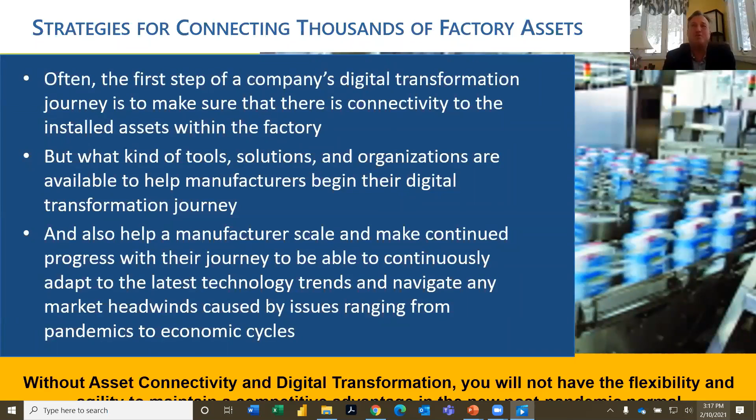So companies are always looking for ways to continue to adapt the latest technology, knowing there may be headwinds in the marketplace that sometimes make it more difficult to obtain and get justification for that technology. But the only thing we can certainly say is that if you don't have asset connectivity and digital transformation, no company, regardless of industry or what you produce, is going to have the flexibility and agility to keep that competitive advantage in this flat world and this post-pandemic new normal we're all moving towards.

So we talked about how essential asset connectivity is to digital transformation. We're all very familiar with Industrial Internet of Things and Industry 4.0. These technologies use low-cost sensors to measure and record the behavior of assets. This behavior helps us with things like proactive maintenance, predictive maintenance, reducing unscheduled downtime, increasing productivity through different KPIs or metrics such as overall equipment effectiveness, and increasing the overall value of the organization and the operation.

So everybody's really been affected by either Industry 4.0 or IoT implementation. You cannot move forward with digital transformation without having that level of connectivity down to the least expensive sensor, because you don't want the weakest link in the chain to be something that's not connected and not providing information. You've got to make sure you have that connectivity to things—even situations where assets on the factory floor are old and need low-cost sensors installed to have that IoT connection, so it can participate in the digital transformation of the organization without a full rip and replace.

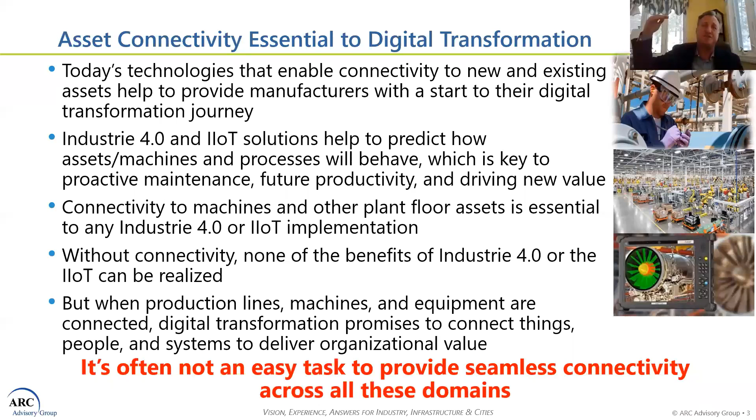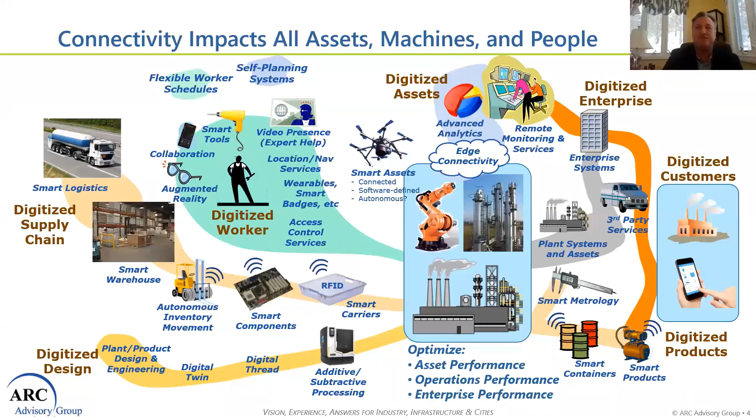You can't get what we call at ARC the single version of the truth if all your assets are not connected. So the idea is that every fixed asset, mobile asset, human asset, machine - the common denominator is everything must be truly connected to achieve the digital transformation required to survive in this world.

And it's not like connectivity is new. There are certainly proprietary network connections that go back to the 1970s and 1980s, for example, and you certainly began to see standards like OPC appear in about 1996. But as these things continue to evolve, what are the latest standards, connectivity tools, and processes to help companies connect those multiple generations of assets on the factory floor.

So we put together a really exciting group of speakers today at this session, coming from automotive manufacturers, standard organizations, and engineering organizations. We're going to present some case studies and solutions that have helped - in this case leading more on the discrete side - to give you the industrial interoperability required to complete your digital transformation journey, provide the business value you're looking for, and most important, especially today, provide manufacturers with the operational resilience to not only survive but thrive in this post-pandemic world.

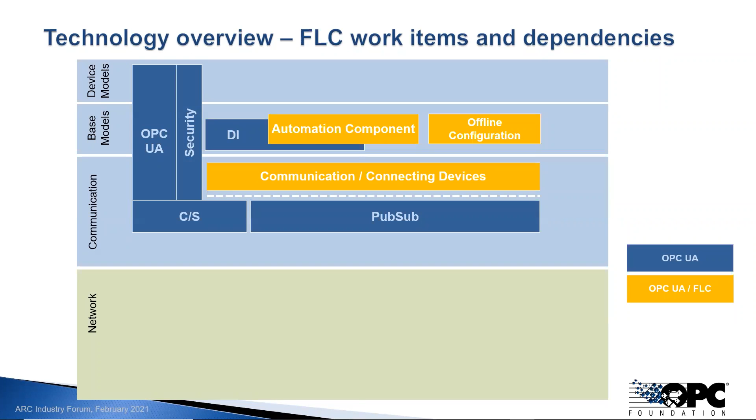The FLC technical working groups are specifying a base model for automation components with the possibility to do offline configuration. In addition, mechanisms for connection establishment are being specified. On top of these base models and base concepts, different device models are being specified for various device types and application areas, covering motion, process instruments, remote IOs, and also functional safety, which is what we call OPC UA safety.

Furthermore, existing or future device companion specifications can be integrated. So for example, the companion specifications being developed by the VDMA, which we will hear about in a separate presentation, can be integrated, or other companion specifications out of process industry, for example PADIM or MDIS.

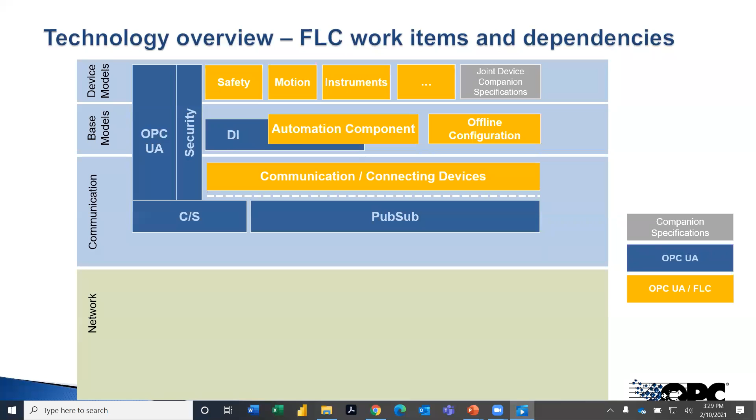When we look down to the network layers, we find the different options for transporting data. This is about using Ethernet or Ethernet TSN, covering also the advanced physical layer or single pair Ethernet, as well as conventional shielded twisted pair cabling. Here we also find the IEC IEEE 60802 TSN IA profile, which is about using the same TSN features to allow multiple protocols to coexist in a common network infrastructure.

The FLC initiative also defines different communication profiles. On one hand side, a UDP/IP profile, which is a routable protocol, very flexible, but then there is a second communication profile optimized for efficiency with a direct layer 2 mapping, used for more demanding applications, for example high performance motion. The complete structure is prepared to also cover additional standards such as 5G or Wi-Fi 6, Wi-Fi 7 in future. Finally, FLC is defining conformance testing to ensure a high level of compatibility and interoperability.

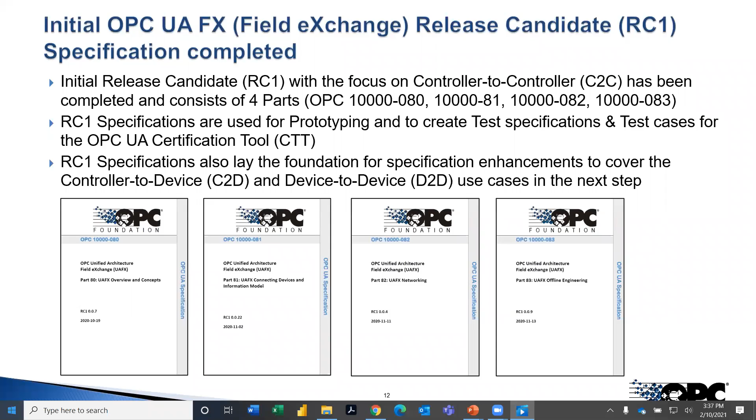We have also published a technical paper which talks about the overall vision, explaining the technical approach and educating on the basic concepts for bringing OPC-UA to the field.

For those of you that want to dive more into the technical details, we are providing additional material, mainly derived from a webinar we held beginning of December last year. This material includes recordings of the various presentations, the different slide decks, and also a compilation of the Q&A.

To summarize my speech, I wanted to explain how the OPC Foundation, together with its FLC initiative, is supporting industrial interoperability from field to cloud and vice versa, covering all the different requirements out of factory automation as well as process automation, including key technologies such as Ethernet TSN, single pair Ethernet, and advanced physical layer, as well as future standards such as 5G, Wi-Fi 6 and Wi-Fi 7.

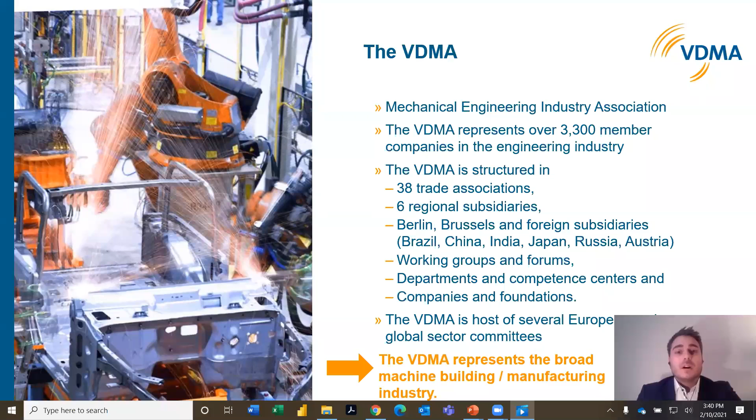And we have the possibility to also harmonize between the different branches because it's all under one umbrella called the VDMA. But let's come to the topic OPC-UA. We need to go one step back, because OPC-UA is not what we were looking for from the beginning. The need of the mechanical engineering industry was standardized interfaces.

So there are a lot of requirements. It has to be on an open platform, security by design, support of different protocols, of course, and importantly, the semantical machine description. This is what I will tell you more about later.

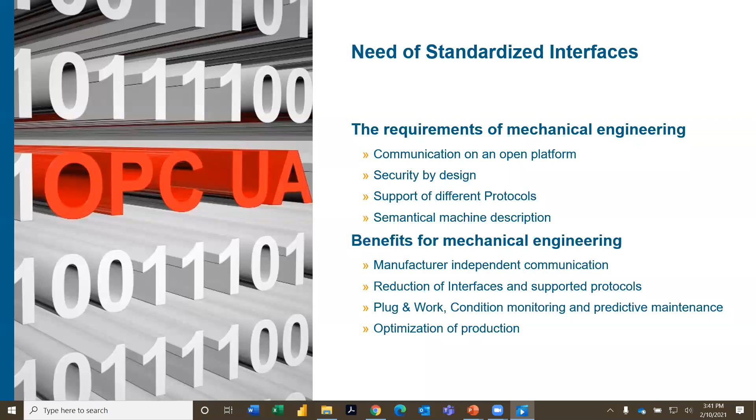And the benefits are clear. It's manufacturer independent communication. You can reduce your supported interfaces and protocols and be more efficient, have a better plug and work promise. You can do easier condition monitoring and predictive maintenance. And of course, you can optimize your production.

The OPC-UA technology was, in our research, the solution which fit these requirements. OPC-UA, Open Platform Communication Unified Architecture, is open source. It has a security by design approach. It supports various protocols, and it has the semantic machine description, the so-called OPC-UA companion specifications.

And those companion specifications, of course, don't fall from heaven. It's hard work to really develop them and bring them into the market. We have a process for that, and we have been doing this for about 4 to 5 years. So I think we know what we are doing.

It starts with preliminary work, where we have to get the critical mass of companies behind those developments so that we have the possibility to really spread the companion specifications worldwide and bring them into adoption. Then we do the content work, defining which information should later be in the interface. Then we do the design in OPC-UA, where the information modeling and the OPC-UA companion specification come into play. And then we have the publication, the use in the industry, and an international approach.

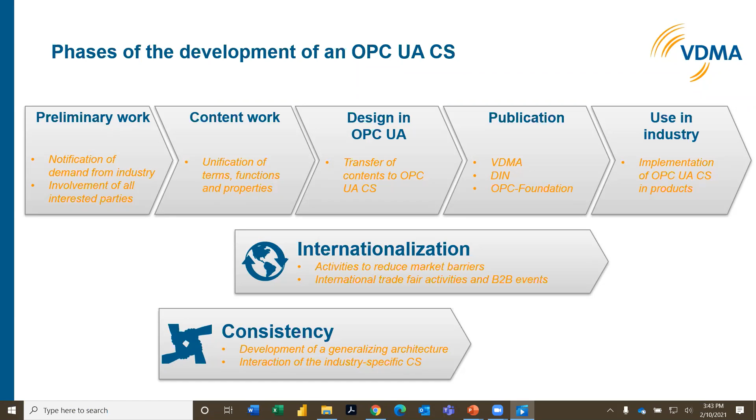And of course this is really important: we are looking for strong consistency between the different specifications. I will give you first an example from the robotic group, of what preliminary work means. They started in February 2017, and about 35 companies were involved. You can see here, on the one hand, the core working group members.

Those are the members who started the group and defined the scope. We have a big group: end users, research, component manufacturers, machine builders, robot manufacturers, system integrators, and IT and software companies were involved. We had strong preliminary work to get the critical mass of companies, of all stakeholders relevant to the OPC UA companion specifications, into the group.

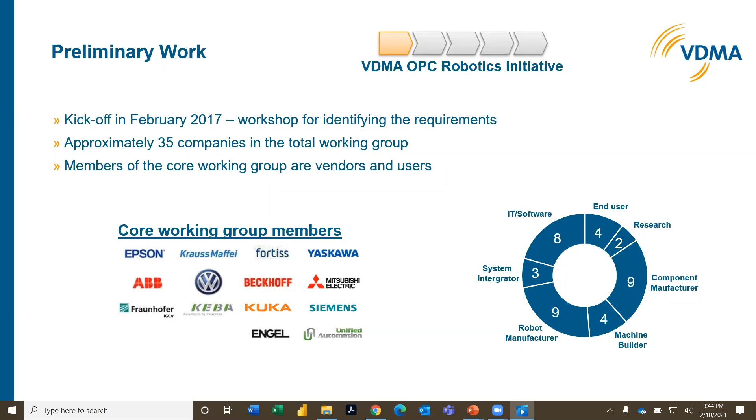The next step - I want to make a short exercise with you. Please imagine a robot. Now I'm pretty sure there are a lot of different robot types in your minds. Some of you will have industrial robots, some mobile robots, some maybe just linear axis. The question was how to bring all these different types of robots into one specification, one interface.

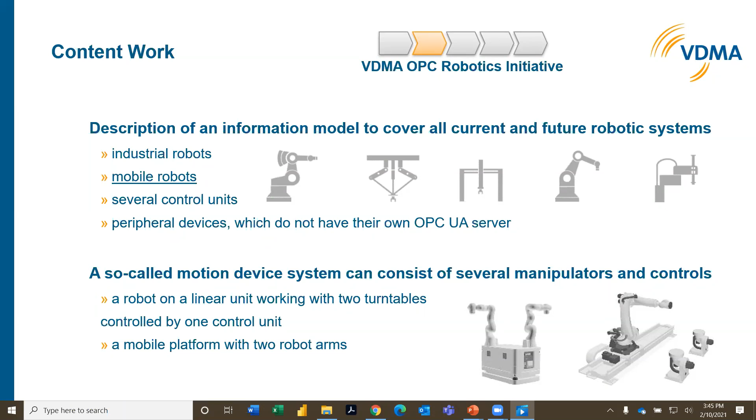This is what we're doing in our content work. The group developed an approach not only for a specific robot, but for so-called motion device systems. A motion device can be anything which has axes, which can turn. Any kind of robot can be described as a motion device.

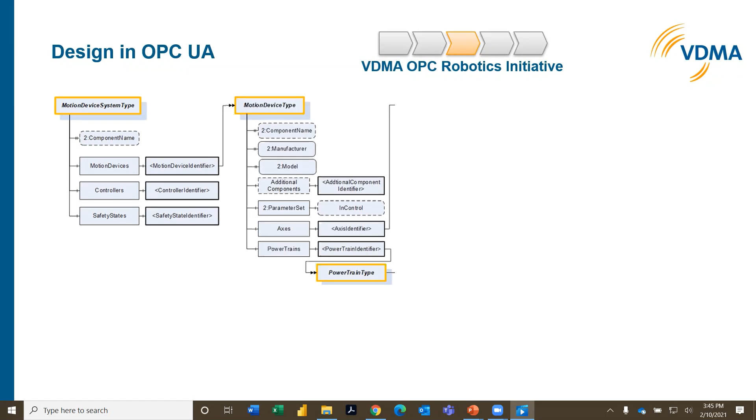In the next step, the design in OPC UA, you can see this approach. There are motion device systems. Motion device systems can contain motion devices, controllers, and also safety states. The motion device itself is built up of, for example, axes and powertrains. A powertrain is a motor and also a gear. The axes are also described in the axis type.

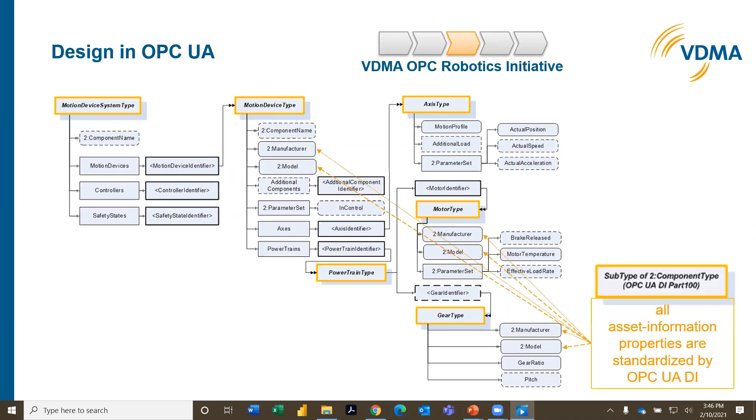Starting with this information model, you can rebuild any robot you had in mind, because if your robot had 4 axes, you can instantiate this axis type 4 times. This was all taken out of the OPC UA DI specification, marked here, and it's all PubSub capable.

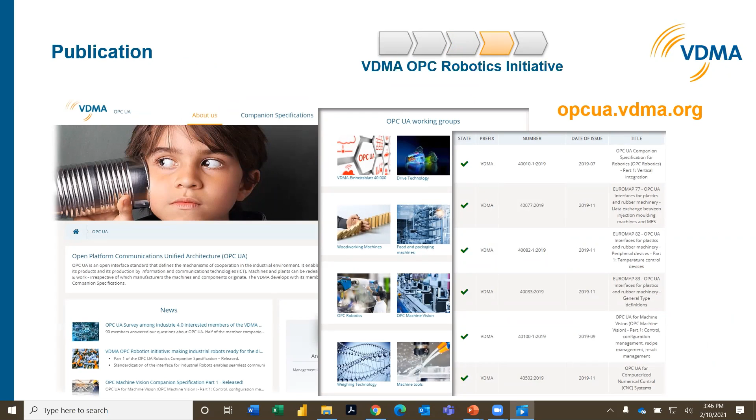For publication, we have a homepage, opcua.vdma.org. There you can find all information about the working groups and also the download area for all the specifications. Last but not least, we are working on these specifications to have them used in the industry.

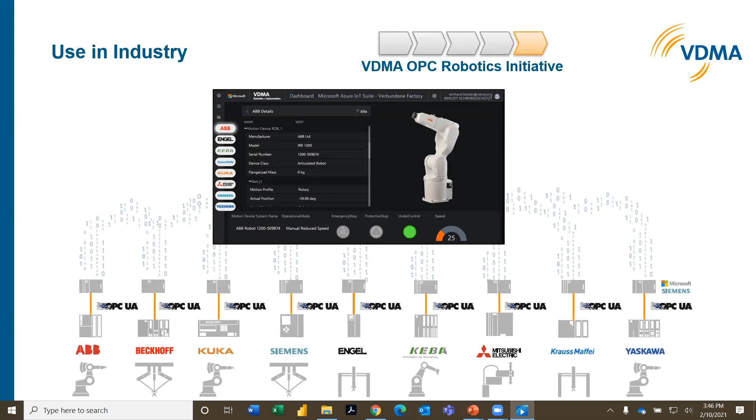For that, we are doing demonstrators. For example, here the demonstrator from robotics, where a lot of robot manufacturers were able to show their capabilities in one dashboard supported by Microsoft Azure Cloud.

Right now I told you about the process to get domain-specific harmonized information models. This is all based on OPC UA, the technology for meshed communication network, and we have working groups doing those specifications. Here you can see the different specification working groups - for example additive manufacturing, cranes, foundry machinery, machine tools, machine vision, plastic and rubber machinery, robotics, woodworking machinery. So really the broad manufacturing industry is working here on OPC UA companion specifications.

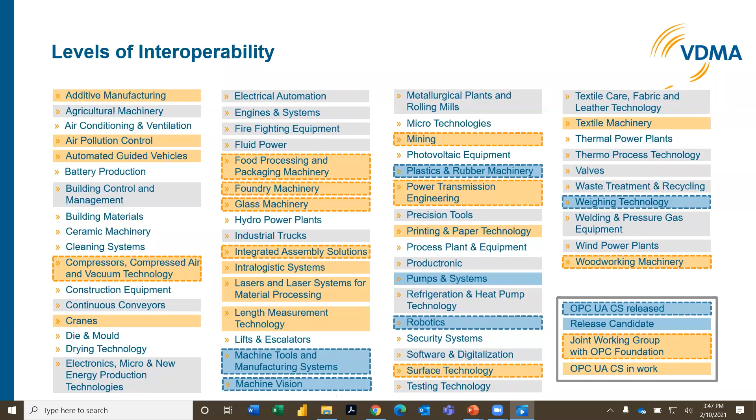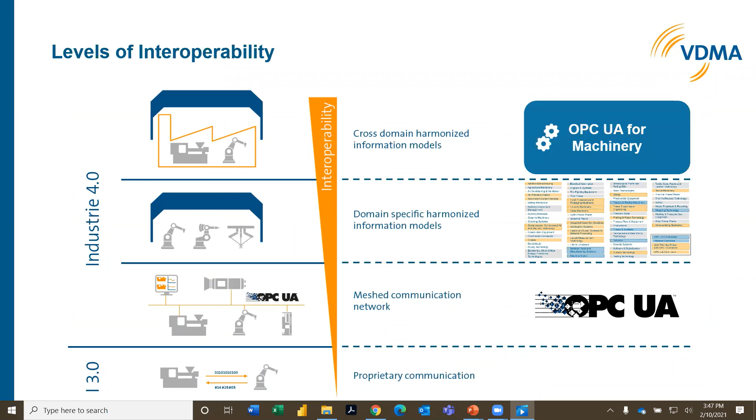In addition to those domain-specific harmonized information models, we need cross-domain harmonized information models. That means we need OPC UA for Machinery. OPC UA for Machinery is a specification which defines building blocks for use cases relevant for the whole machinery industry - for example, identification of machines and components, the topic of machine status, job management, and more.

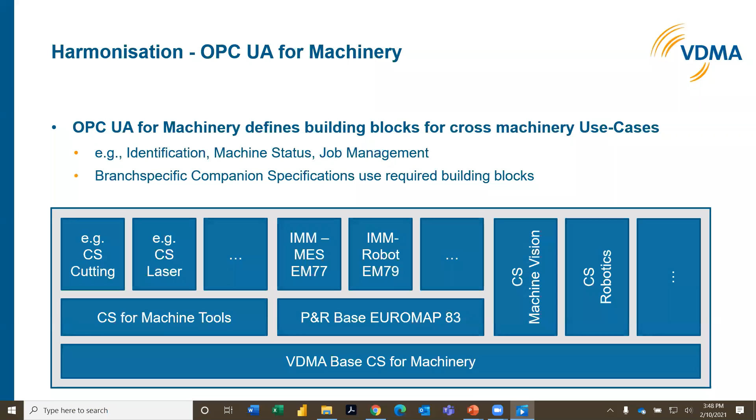All the specific companion specifications from the different branches of the machinery industry are using OPC UA for Machinery as a base for their domain-specific specification work. With this, we have a common basis, and the different domains can then build their specific needs and specific interfaces on OPC UA.

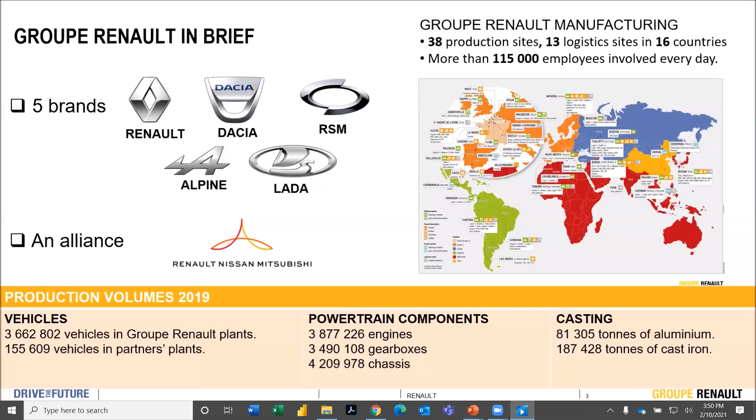In 2016, Renault launched numerous digital initiatives in a benchmark factory in Spain. From this experience, in 2017, we launched many digital transformation projects.

This project revolved around 5 major pillars: real-time data-driven operation, full track and trace, flexible supply chain and plant, Process 4.0, and connected workforce. The subject I will detail lays the foundation for several transversal subjects.

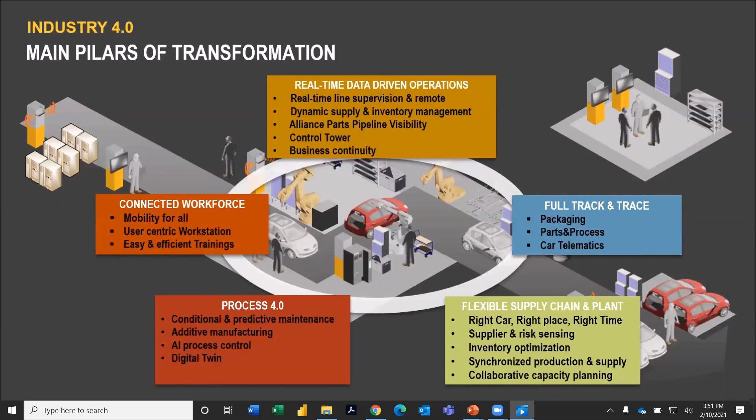Regarding industrial data, over time we have accumulated numerous technical solutions which have partitioned the data by typology. Several examples allow me to illustrate my remark.

An example on traceability in the powertrain plant: an Atlas Copco system where we have Atlas tightening controllers, and for conditional maintenance on robots, we have a specific system per brand.

If we talk about automated installations, we have installations from way back until today, with significant diversity of automation and protocol components.

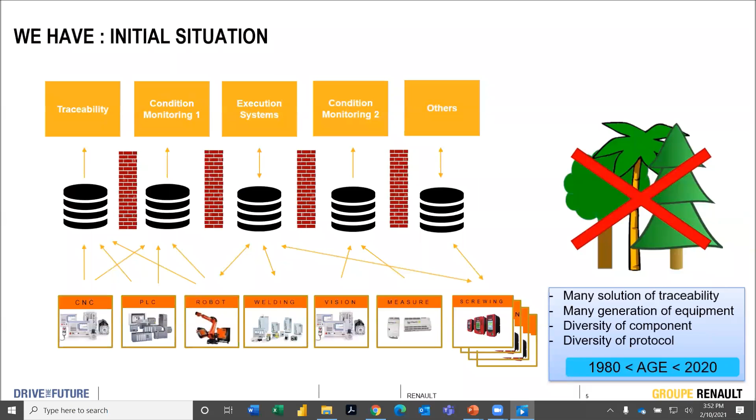Each of the technical solutions has its own architecture, and when we try to mesh data together, it is very complicated.

When we look at industrial installations, we have a lot of data from industrial equipment such as PLC, input-output, Boolean, robot, vision system, variable speed drive.

If we look at the functional need, we need answers on product traceability, process traceability, measures, state of stock, photo, and video. For the end customer, we see that this data is of interest to many businesses in the company: quality, energy consumption, maintenance, automation, and manufacturing.

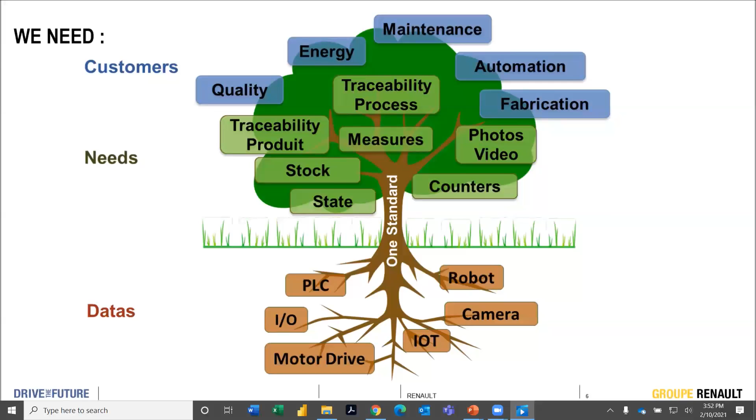To meet these multiple needs, we have defined a standard for data capture, and we have a strong slogan that is spread across the company with a common target: collect once and use many.

For the capture of industrial data, there are 2 essential layers: the industrial layer, or repository layer, where we have defined the data model and the single publication table; and the data acquisition layer, where we collect structured data from different industrial equipment.

The conditions for success for this digital transformation: a common data dictionary, a unified information structure, the right granularity of data for a maximum of use cases, a worldwide standard, and a common automation and IT approach.

To meet this condition, we have chosen OPC UA technology with a data model approach. This element will make it possible to meet the challenge of the factory of the future, where we have unified data capture, interoperability, machine-to-machine communication, edge, cloud, big data, machine learning, artificial intelligence, and digital twin.

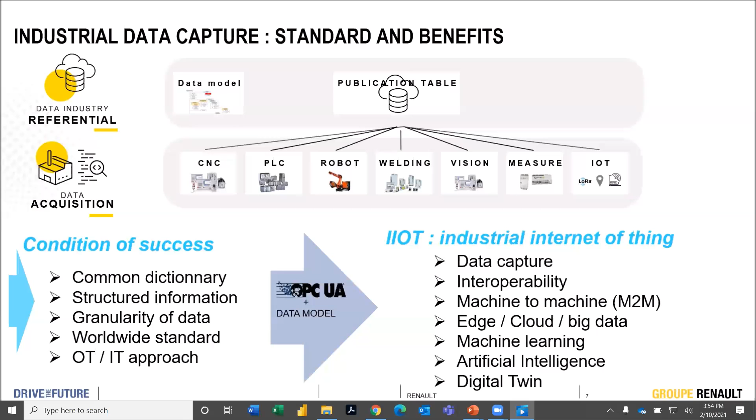Here is a quick overview of the architecture implemented with 3 levels. The first level is at machine level, where we have implemented a software brick called UDC, for Unified Data Collector. This software transforms all proprietary protocols into OPC UA with a structured data model.

A second level at the factory level, where we have implemented a software brick called DFA, for Data Flow Aggregator, where we aggregate factory data to send it to the internal cloud until mid-2020, and to Google Cloud Platform since that date.

Some interesting data on the capture of industrial data: 3,300 devices deployed in OPC UA, 300 billion data points collected since the start of the project, data from 17 factories representing a flow of 10,000 messages per second.

We use OPC UA technology for Industry 4.0. From Industry 4.0, we have more than 1 million measuring points. We collect different forms of data: Boolean, string, analog value, table, file, and image.

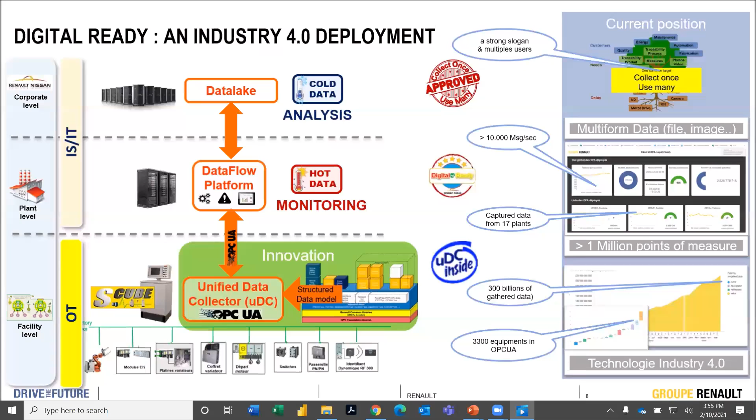The organization we have implemented includes a team dedicated to the data model, made up of a multidisciplinary group from OT, IS/IT, and process engineering, which has already made 40 data models for the powertrain plant and 10 data models for the vehicle plant, with a target of creating 200 data models.

A team dedicated to software development with 4 fundamental building bricks: MagicDraw plus add-on for the data model, UDC for industrial equipment, DFA for aggregation, and Google Cloud Platform for the publication table. The target is to be plug and work.

A deployment team made up of factory and corporate automation engineers to implement UDC in industrial facilities. We first deployed 100 pieces of equipment in 2018, 900 in 2019, and 2,000 in 2020. The current target is to deploy at large scale.

An OT and IS/IT monitoring team monitors the performance of the complete flow. We have added additional information in the data feed to qualify end-to-end performance, and we have a real-time dashboard to see all the events. The target is to have an incident rate below 0.5%.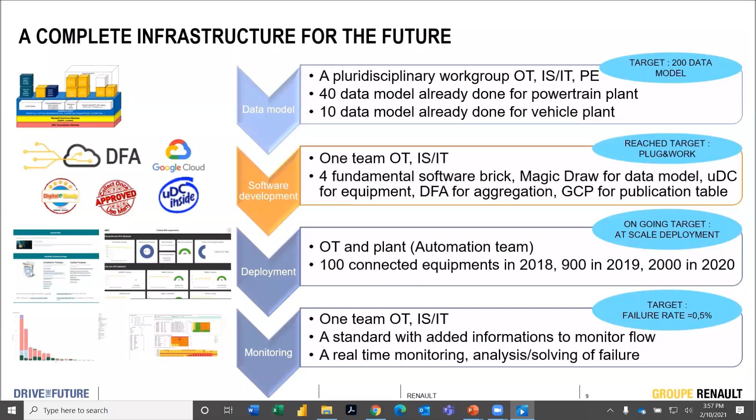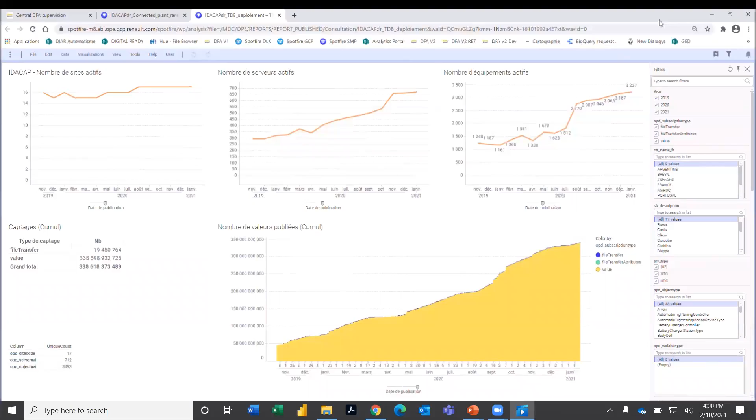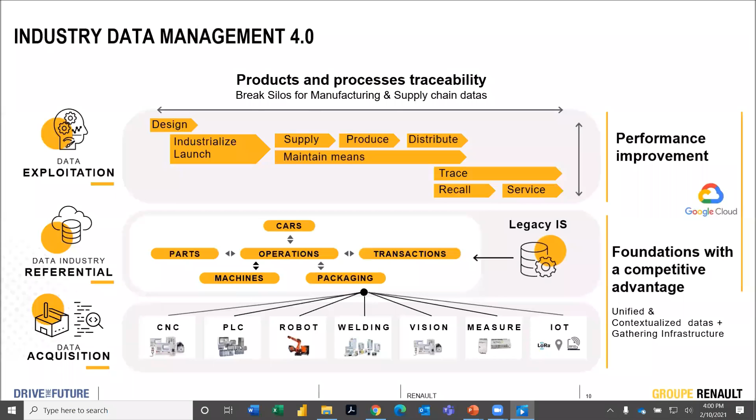Google, with Google Cloud Platform, brings us their know-how on big data. Because we have contextualized the data, it's easy to develop use cases with the unified data. An example in the robotic area in body shop, and from the data we have developed 3 use cases.

The first concerns the monitoring of robot and roller table cycle time to identify workshop bottlenecks. It is based on the data from the PLC. This use case is deployed in 10 factories and has generated significant savings in 6 factories.

The second concerns the detection of sticky points on welding guns and relies on the collection of torque and position information from robots and vehicle information from the PLC.

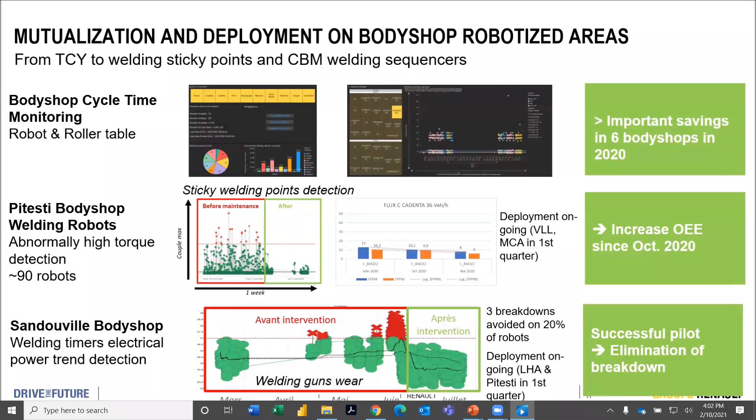The third concerns the monitoring of parameters where the welding controller seeks to identify the drift of physical quantity to anticipate breakdown on welding guns. This made it possible to reduce the maintenance workforce. There is no longer any need to manually measure the resistance of the welding gun every week.

To end this presentation, we would like to present our vision of the world of industrial data. Our dream is to implement OPC UA from machine to cloud. As the data is structured in the machine, it can be used by all IT systems, from the dashboard, MES, ERP, or the cloud. This will ensure two-way, bidirectional communication, without modification and without development.

We imagine an ideal world where the data will circulate without modification, only with configuration. For the long term, we believe that car manufacturers should work together to share a unified data model to avoid rework at our machine suppliers. From structured information, it is conceivable to have a rapid deployment of artificial intelligence and machine learning, and Google will help us to achieve it.

In conclusion, we believe interoperability is a key part of the factory of the future. Groupe Renault has chosen OPC UA technology to achieve this.

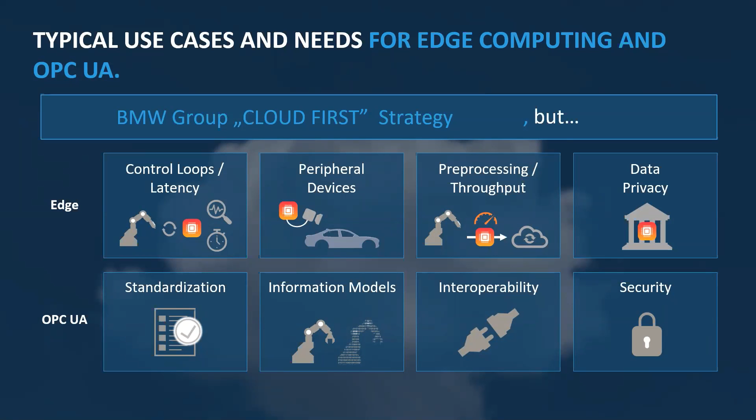And that works quite well together with OPC UA, because standardization is a big benefit to the goals we've seen on the first slide. Also, with the information models and companion specifications, for example for robots, that helps us a lot. Third topic is the interoperability of components using OPC UA, especially with public cloud and edge computing - security is a bigger topic than before. So with the functionalities OPC UA offers, that's a big help for us in leveraging these technologies.

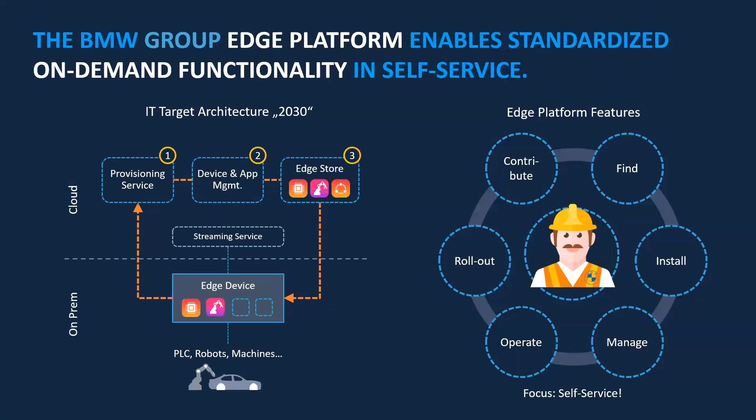Main benefits for us in that case are also focused on standardization. So all these applications are packed in Docker containers with central IT policies. As I already told, contribution from different departments is possible. We're focusing on a hybrid approach, so that edge device could be an industrial PC directly sitting at a production line, but it could also be an on-prem data center, so on a higher level. And with that platform, we are enforcing security functionalities like container checks or device policies.

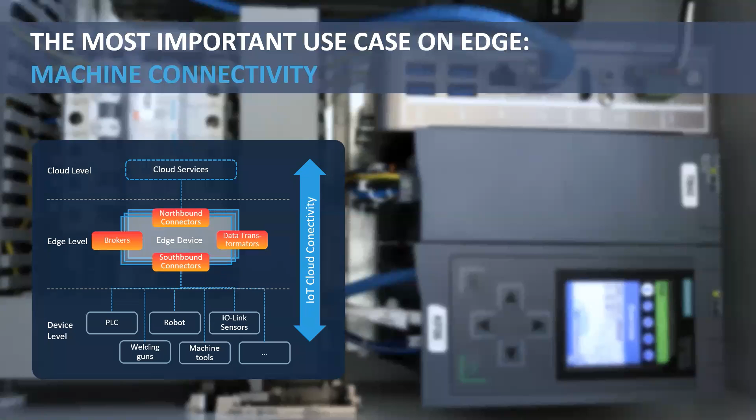But of course, the most important use case on the Edge is machine connectivity. So not only southbound connectors, where OPC-UA is our main focus, but also data transformations, and then providing them northbound to other cloud services or streaming services in our case. And we're focusing on OPC-UA.

I would also like to introduce the main phases of what we've done in the past and are doing right now. First, you have to establish OPC-UA as a standard for new equipment. That started with some tests in our production sites, and now all new equipment is at least OPC-UA ready, has OPC-UA server on board, and can be integrated into future applications.

Then during operation and building of cars, OPC-UA works well together with our Edge functionalities. With OPC-UA as a standard, the centrally managed rollout and changes in data access are easy. Also from business departments, for example for failure analysis, the flexible and ad hoc data access is really a key success factor.

That's also a big help for integration of new IT applications, with the common interface companion specifications which OPC-UA provides. And if you have to do replacement or modification in your production equipment, you can do that across suppliers if they're all sitting on the same companion specification and OPC-UA standards, which makes it really easy to integrate and exchange.

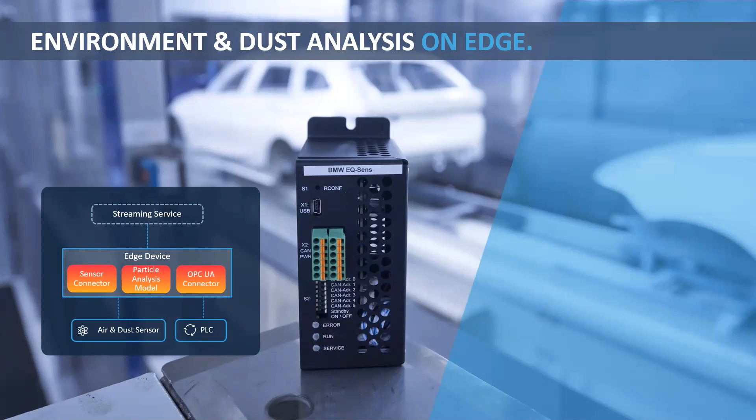First, the dust analysis on the edge in the paint shop that you can see here in the background. We have the edge device here, which has connectivity to sensors, but also OPC-UA connectivity to PLCs to get more information about the whole environment, where we do a particle analysis model directly on the edge and provide the results to higher IT production systems to ensure quality in our paint shops.

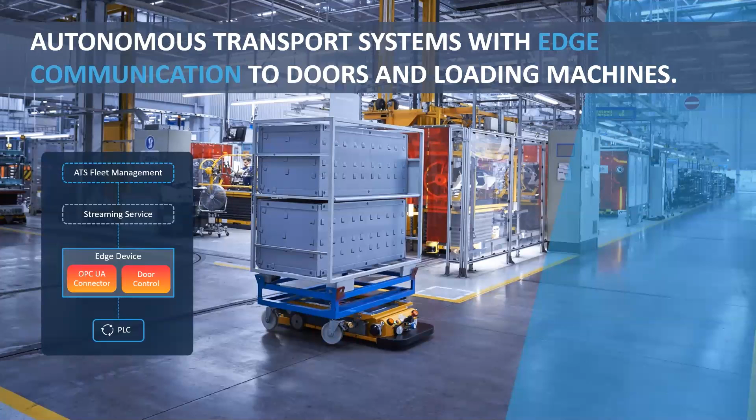The second one is not the classic data use case. It's in the field of autonomous transport systems, and you can see one of these robots traveling around the plant. There are some cases where there are doors, and in that case we're also using edge devices with an OPC-UA connector to the PLCs to control these doors, opening and closing them.

Also in that case, our ATS fleet service management sits in the public cloud. So that's really already in the target architecture an application, and it's already used in our plants.

We're not only doing that for ourselves, we're also doing it in a community. That's why we founded, together with colleagues from Microsoft, the Open Manufacturing Platform. After that, a lot of other companies joined us, as you can see here on the logos. Currently we're working in different working groups, for example reference architecture, semantic data structuring, or autonomous transport system core services.

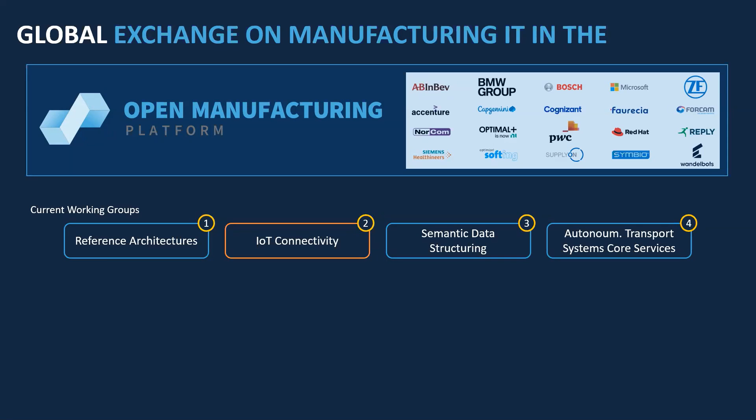But also on IoT connectivity. IoT connectivity focuses on architecture discussion, sharing of know-how and best practices, but the main focus is developing code together and providing it as open source. And all of that is based on OPC-UA as a common standard.

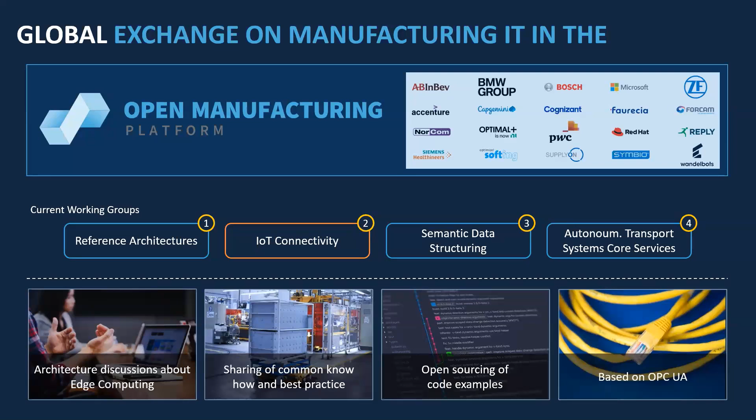If you would like to join, just go to openmanufacturing.org and click there to join us or get more insights. For example, you can also get our white papers there, and we will be happy to get new members.